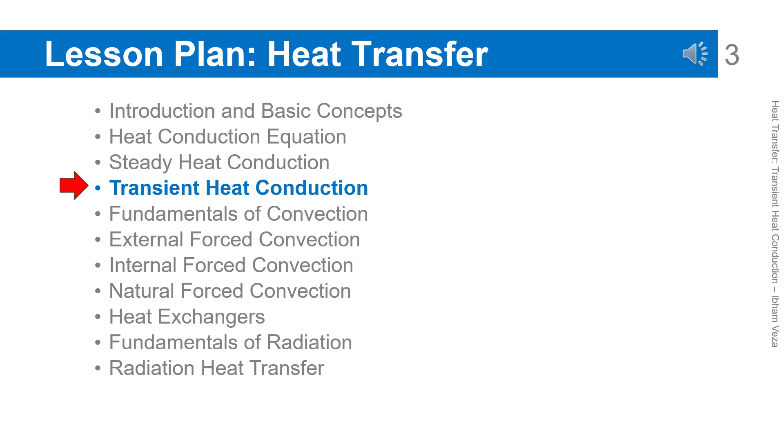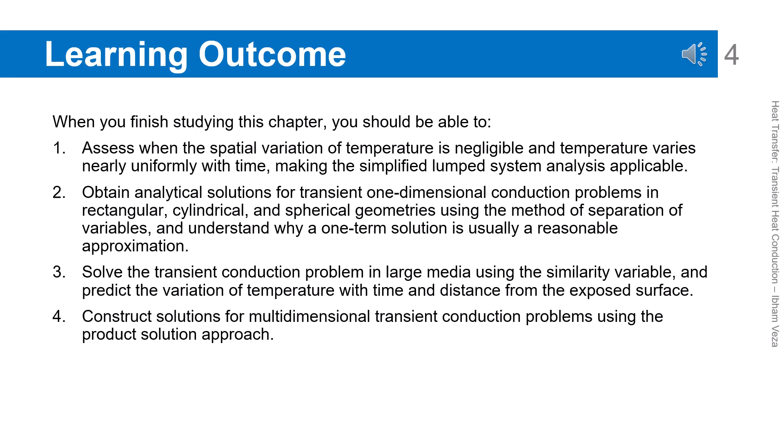Learning outcome. The learning outcomes emphasize the ability to choose the appropriate method for transient conduction problems. Students are expected to distinguish when the lumped system approach is applicable and when it is not. In addition, analytical solutions for different geometries are a major focus. The concepts of semi-infinite media and multidimensional solutions are also introduced. Overall, the outcomes are oriented toward analytical and modeling skills.

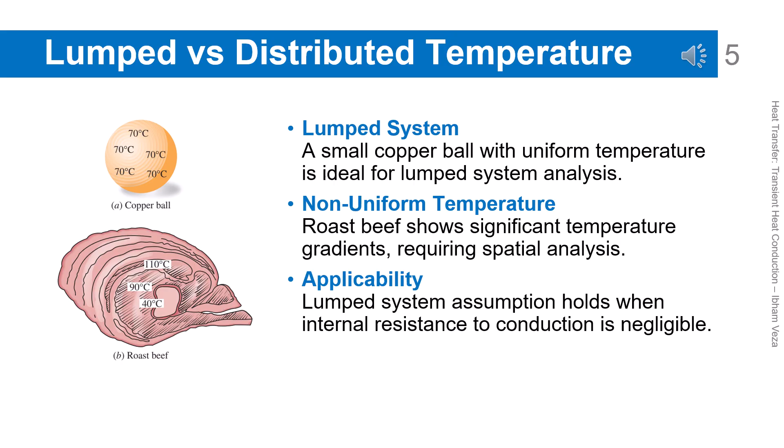Lumped versus distributed temperature. This concept compares two extreme cases of temperature distribution inside a body. In a lumped system, the temperature is assumed uniform throughout the body and changes only with time. In a distributed system, significant temperature gradients exist inside the material. This difference determines the complexity of the model that must be used. Choosing the correct assumption is critical for obtaining accurate and efficient results.

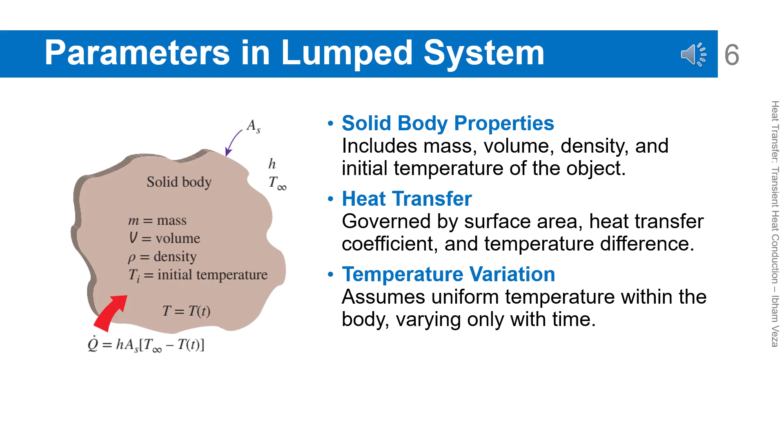Parameters in lumped system analysis. The lumped system analysis is based on the physical properties of the body, such as mass, volume, and initial temperature. In addition, surface heat transfer by convection plays a central role. The body temperature is assumed uniform and only a function of time. This greatly simplifies the energy balance equation. However, this simplification is valid only when the physical conditions are satisfied.

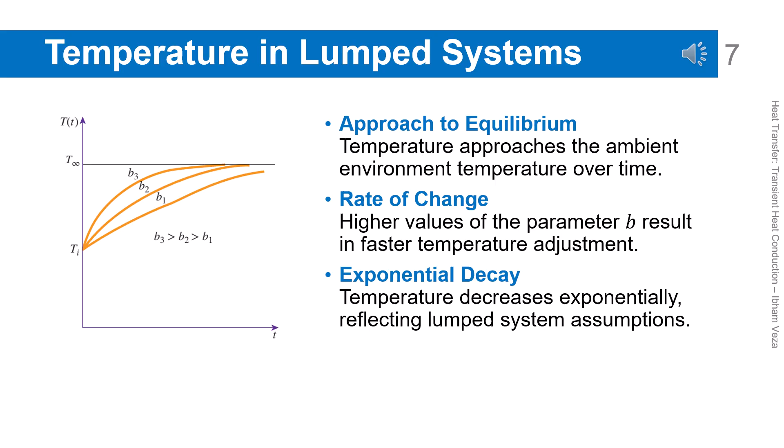Temperature behavior in lumped systems. The temperature change in a lumped system follows an exponential trend with time. At the beginning of the process, the temperature difference is large, so the heat transfer rate is high. As time progresses, the body temperature approaches the ambient temperature asymptotically. The parameter B controls how fast the system reaches equilibrium. This behavior reflects the assumption of no internal temperature gradients. Temperature decreases exponentially over time, reflecting lumped system assumptions.

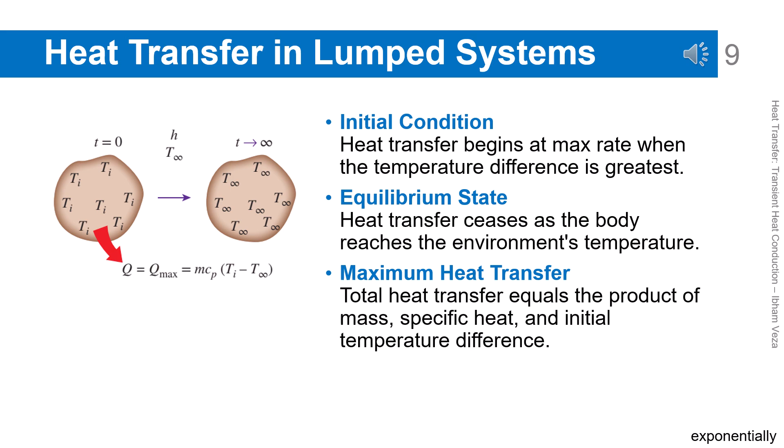Heat transfer in lumped systems. At the beginning of the process, the heat transfer rate is at its maximum because the temperature difference is the largest. As time passes, the temperature difference decreases, and the heat transfer rate also decreases. At the final condition, the body temperature equals the ambient temperature, and heat transfer stops. The total heat transferred can be calculated from mc times Ti minus T infinity. This concept is very useful for estimating simple heating or cooling times.

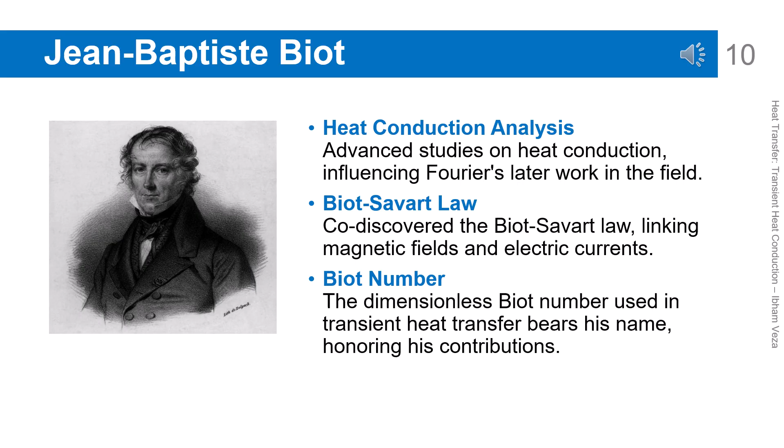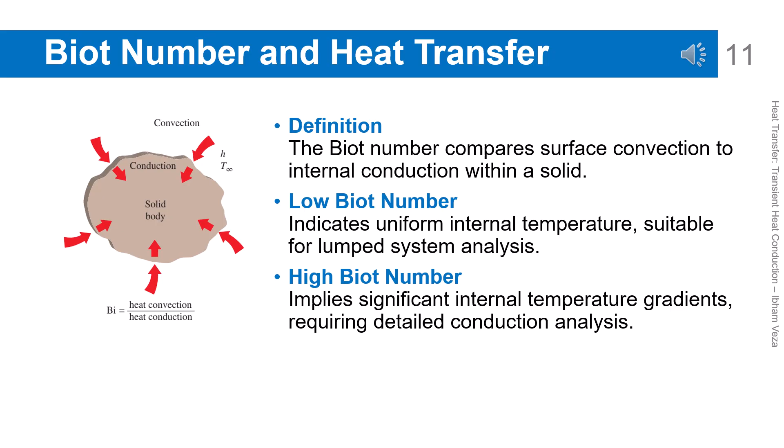The Biot number and heat transfer. The Biot number is used to assess whether internal temperature gradients can be neglected or not. If the Bi value is small, the internal conduction resistance is much smaller than the convection resistance. In this condition, the lumped system assumption is valid and safe to use. If the Bi value is large, internal temperature gradients are significant and a distributed analysis is required. Therefore, the Biot number becomes the main criterion for model selection.

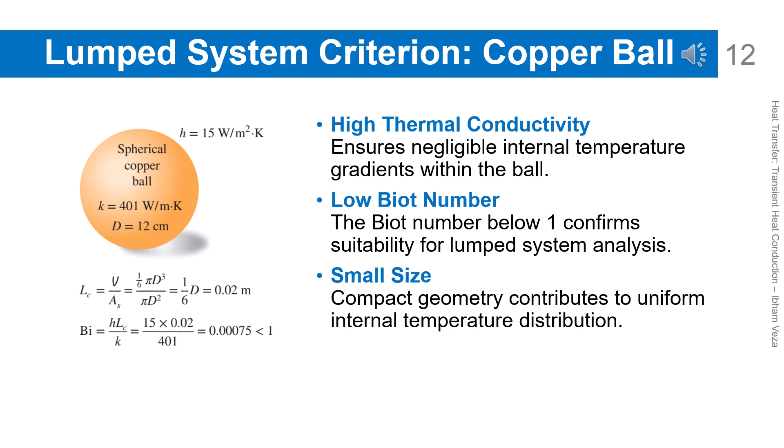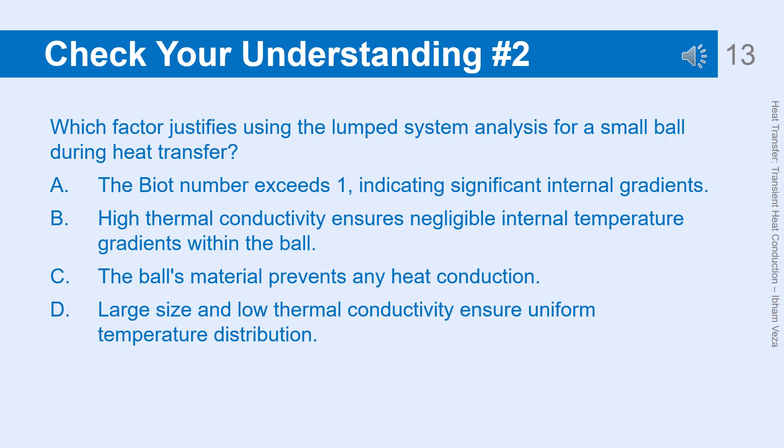Explanation of incorrect answers. A: Incorrect. A Biot number below 1, not exceeding 1, confirms the lumped system is valid. C: Incorrect. Heat conduction is essential for uniform temperature; preventing conduction contradicts the analysis assumption. D: Incorrect. Small size, not large size, combined with high thermal conductivity, ensures uniform temperature distribution.

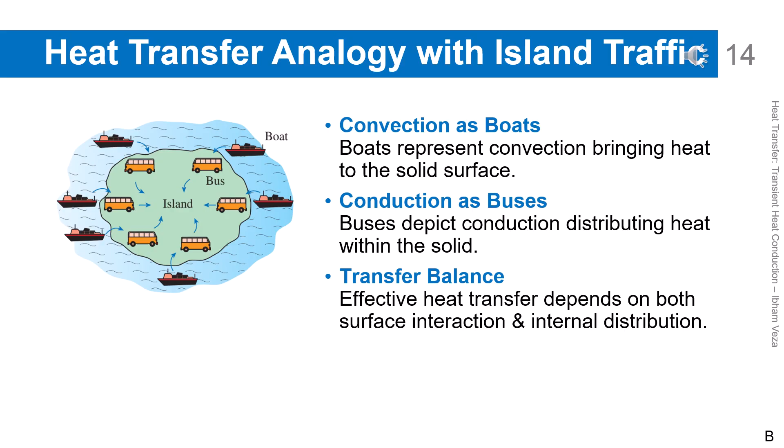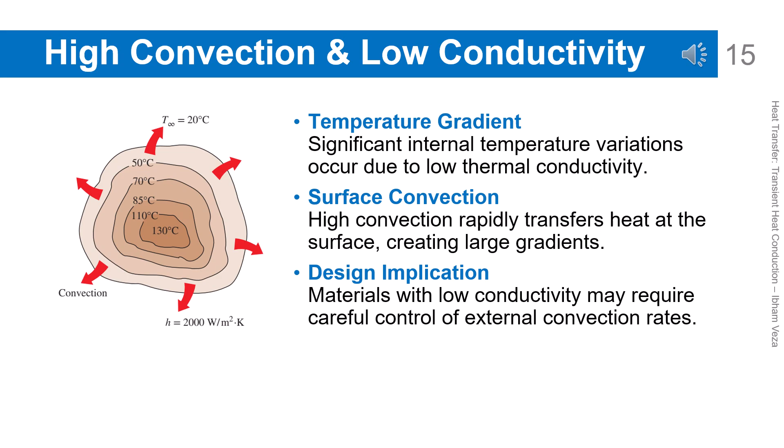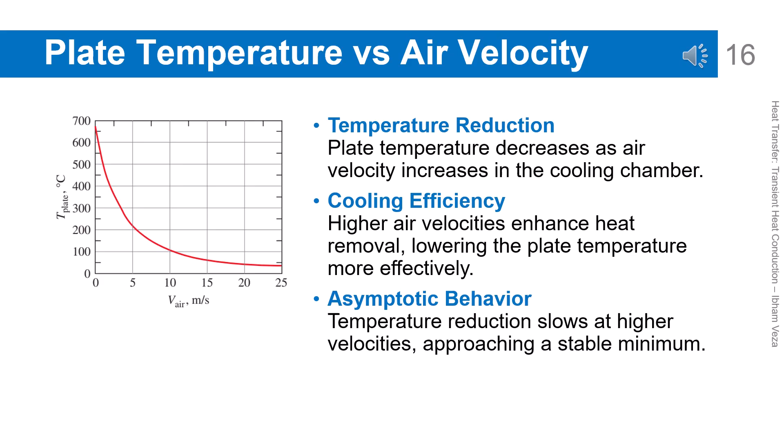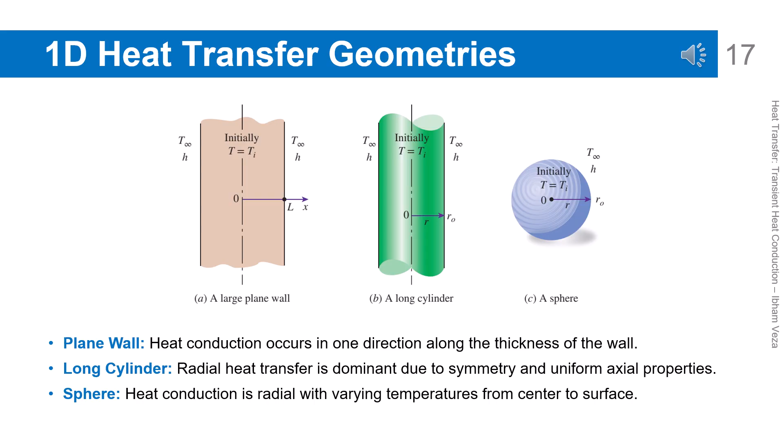One-dimensional heat transfer geometries. In these 3 geometries, the initial condition is usually a uniform temperature throughout the body. After that, heat transfer occurs by convection at the surface. Because of symmetry, the temperature variation needs to be analyzed in only one spatial coordinate. This approach significantly reduces mathematical complexity and is the basis of many classical analytical solutions of transient conduction. Heat conduction in a sphere is radial, with varying temperatures from center to surface.

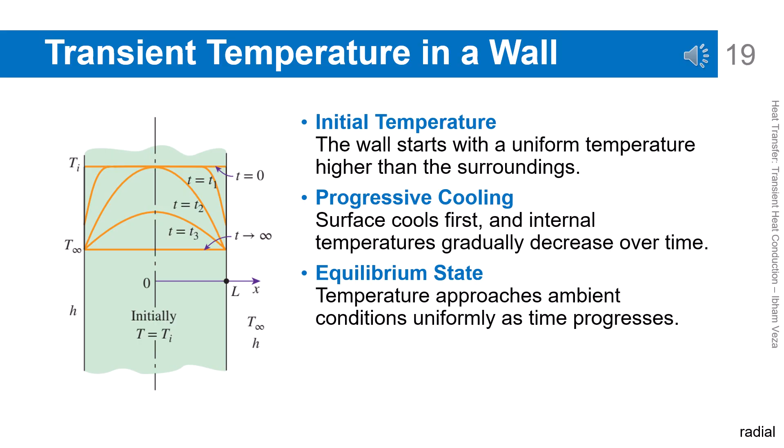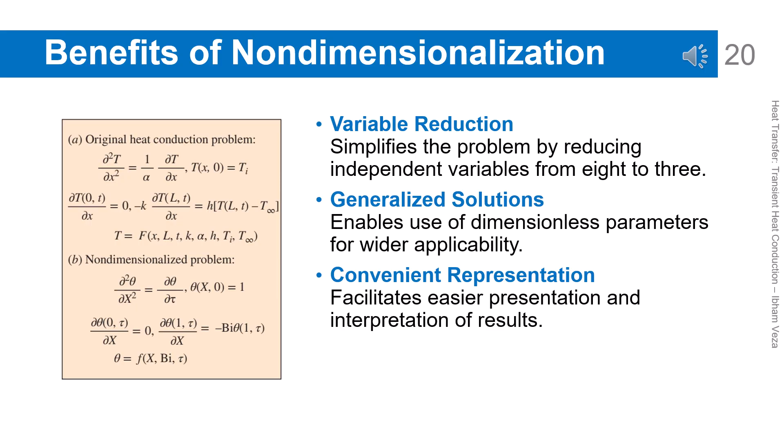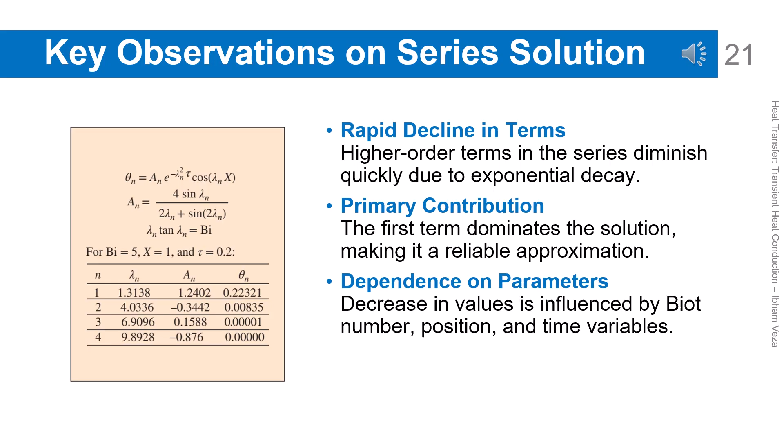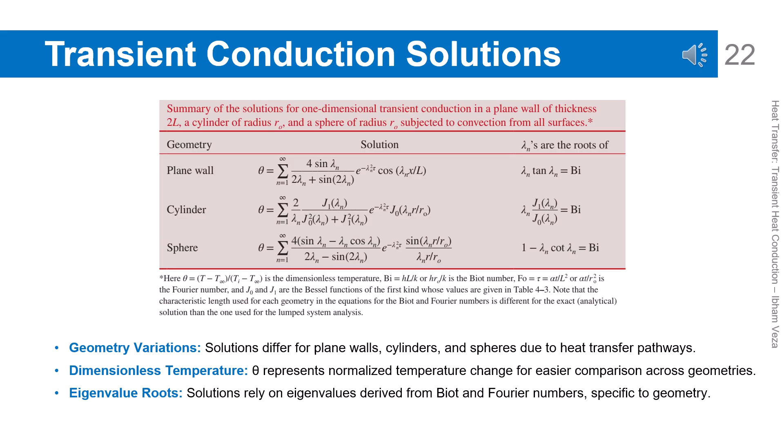Transient conduction solutions. This slide emphasizes that transient conduction solutions strongly depend on the geometry of the body. Dimensionless temperature is used to unify different cases within one analytical framework. Each geometry has different eigenvalue roots. Plane walls use trigonometric functions, while cylinders and spheres use Bessel functions. All solutions are still linked by the role of the Biot number as the connection between convection and conduction.

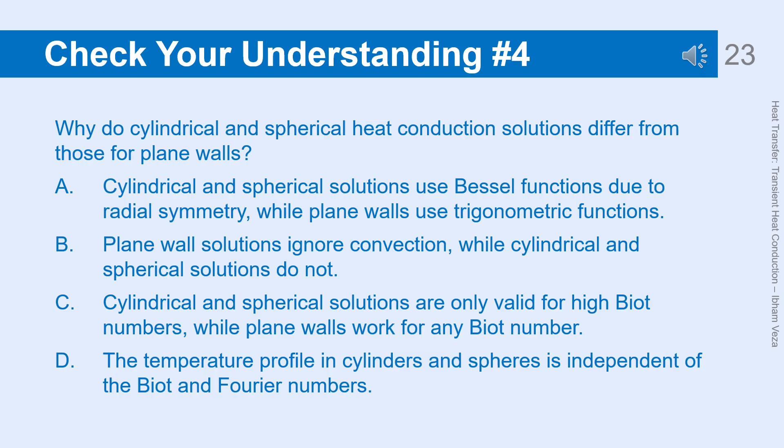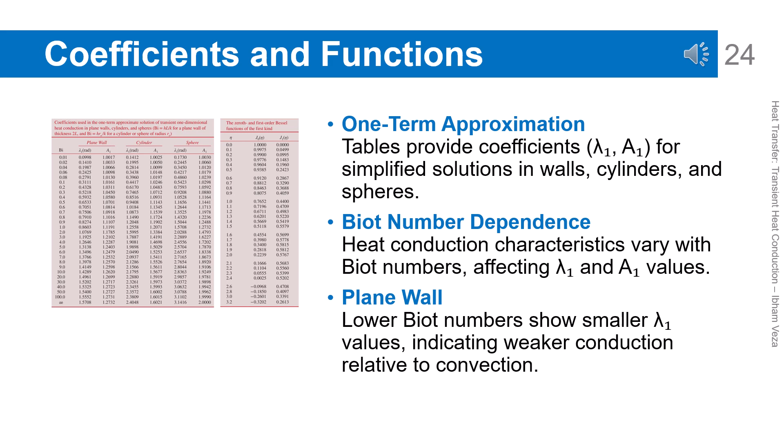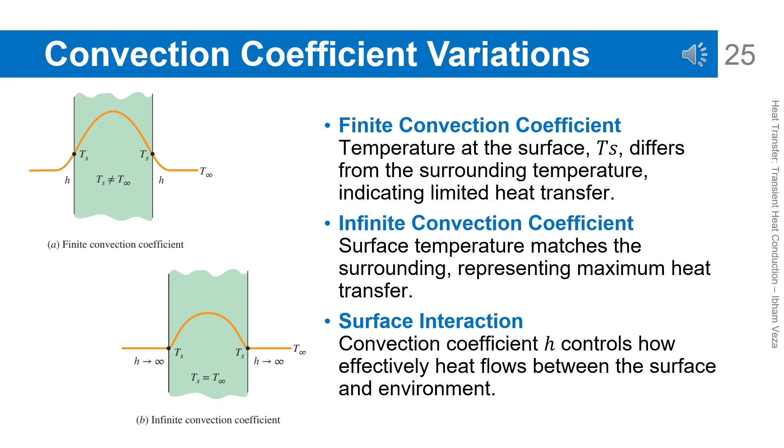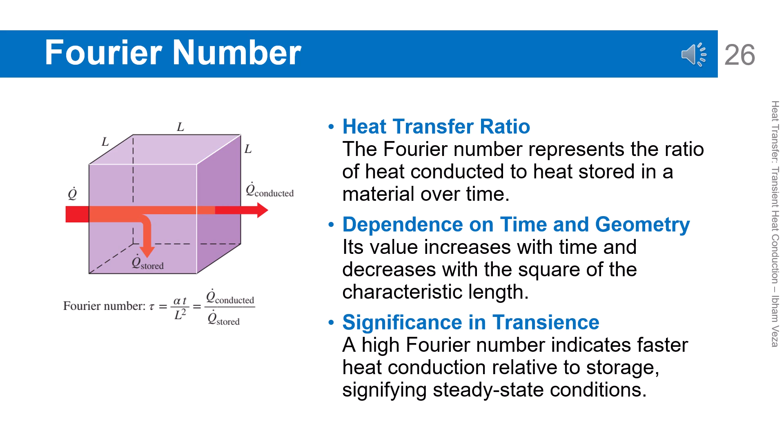Fourier number insights. The Fourier number represents the ratio of heat conducted to the heat still stored in the body. Its value increases with time and decreases as the characteristic length becomes larger. This number essentially measures how far the transient process has progressed. If its value is large, the system is close to steady state. Therefore, the Fourier number is a very important dimensionless time parameter, representing the ratio of heat conducted to heat stored in a material over time.

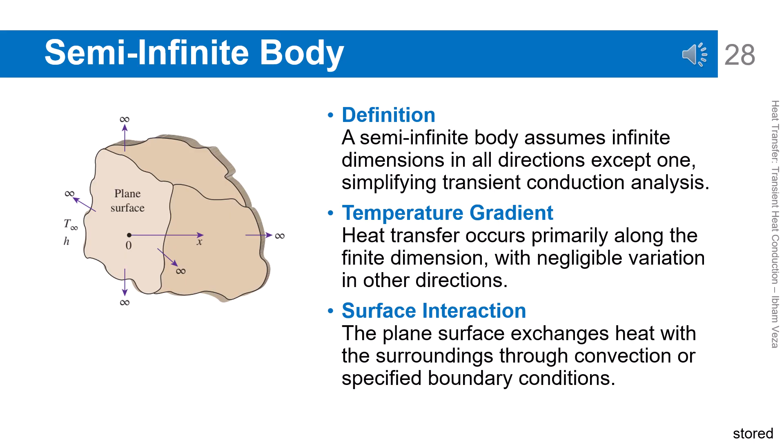Semi-infinite body characteristics. A semi-infinite body is assumed to be so large that heat has not reached the deep interior during the time of interest. With this assumption, the temperature gradient is significant only near the surface. This greatly simplifies the mathematical solution of transient conduction. This approach is suitable for short-time surface heating or cooling problems. Many early-stage industrial heating processes can be modeled using this assumption.

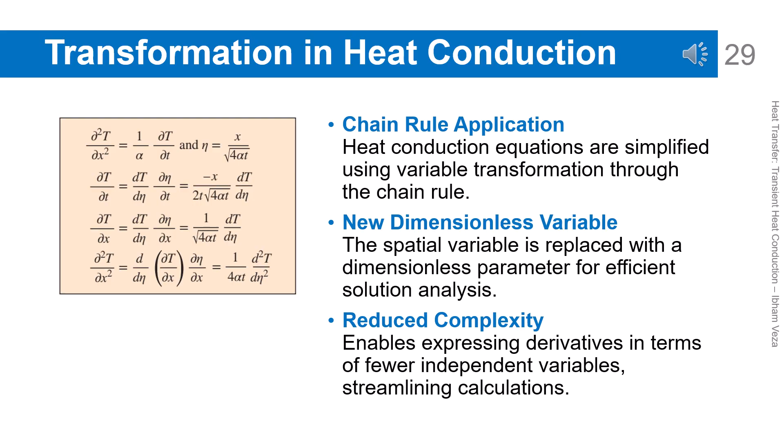Transformation in heat conduction differential equation. By applying the chain rule, derivatives with respect to space and time can be expressed in terms of a new variable. This new variable is usually a combination of position and time. This approach reduces the number of independent variables that must be handled explicitly. The result is an equation that is simpler and easier to solve analytically.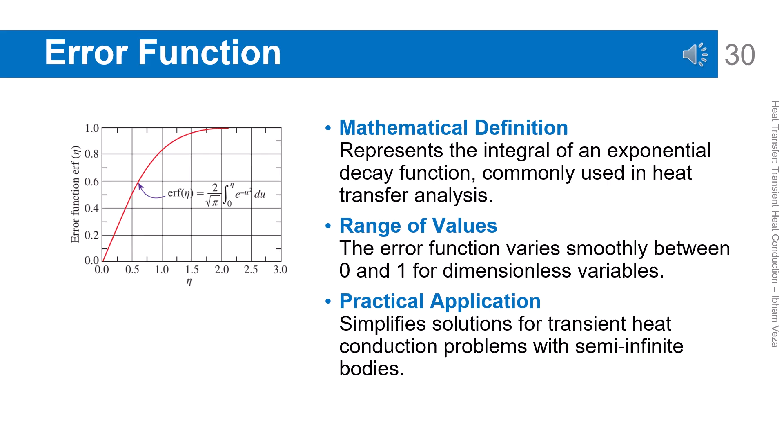Error function characteristics. The error function naturally appears in transient conduction solutions for semi-infinite bodies. Mathematically, it originates from the integral of a decaying exponential function. Its value varies smoothly from 0 to 1 over the range of the dimensionless variable. In the context of heat transfer, this function describes how far the surface temperature influence has penetrated into the material. Therefore, the error function is very important in modeling transient heating and cooling.

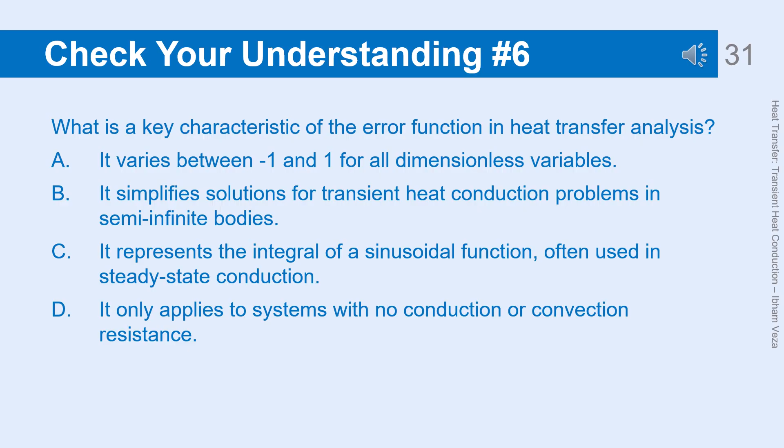Dimensionless temperature distribution. Dimensionless temperature distribution is used to present results in a general form without being tied to specific units. For a semi-infinite body with constant surface temperature, the solution follows the complementary error function form. The temperature decreases with increasing distance from the surface and with time. This approach allows one graph or one equation to be used for many physical cases. This is the main strength of using dimensionless parameters in transient analysis.

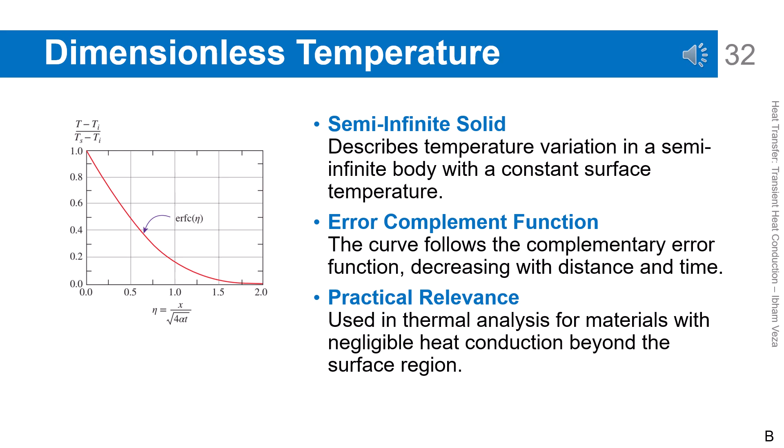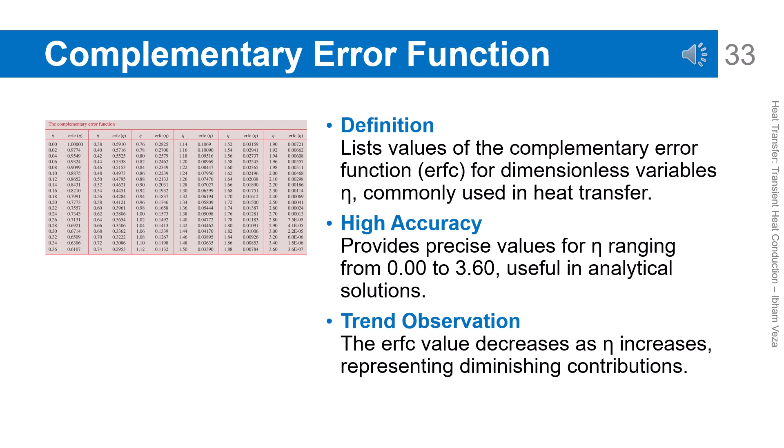Complementary error function table. This table provides numerical values of the complementary error function for various values of the dimensionless variable. These values are very important for practical calculations without performing manual integration. When the required value is not listed, interpolation can be used. The table shows that the function value decreases as the variable increases. With this table, transient conduction analysis becomes much more efficient.

Temperature variation in a large cast iron block. This slide illustrates various possible boundary conditions at the surface of a large body.

If the surface temperature is specified, heat penetrates deeper with time. If the heat flux is specified, a surface temperature gradient forms and gradually spreads inward. If convection dominates, the temperature curve shape is strongly influenced by the convection coefficient.

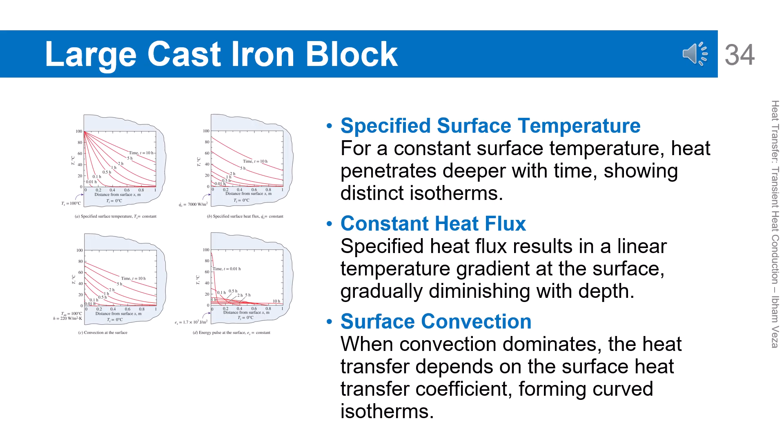All cases show that deeper regions require more time to be affected by temperature changes. High thermal diffusivity ensures quicker heat penetration and broader temperature distribution.

Temperature variation in semi-infinite solids. In a semi-infinite solid, the temperature is initially uniform and then changes due to convection at the surface. A higher convection coefficient causes faster cooling or heating near the surface.

The temperature distribution is usually expressed in a dimensionless form to allow comparison across different times and positions. Deeper regions require more time to experience significant temperature changes. This behavior shows that transient processes are strongly influenced by both depth and time.

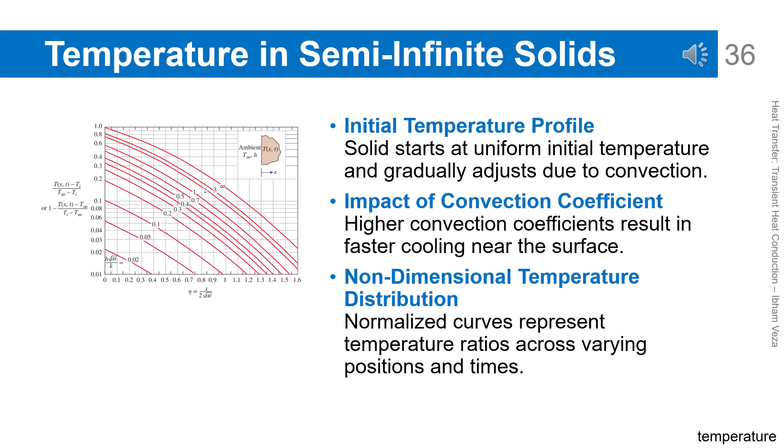Heat transfer between two semi-infinite solids with different initial temperatures come into contact. A temperature gradient immediately forms near the interface. Heat flows from the hotter body to the colder one until a local equilibrium is established at the interface. The interface temperature reaches an intermediate value determined by the thermal properties of both materials.

Heat then propagates into each solid at a rate governed by their thermal diffusivities. The penetration depth increases with time on both sides.

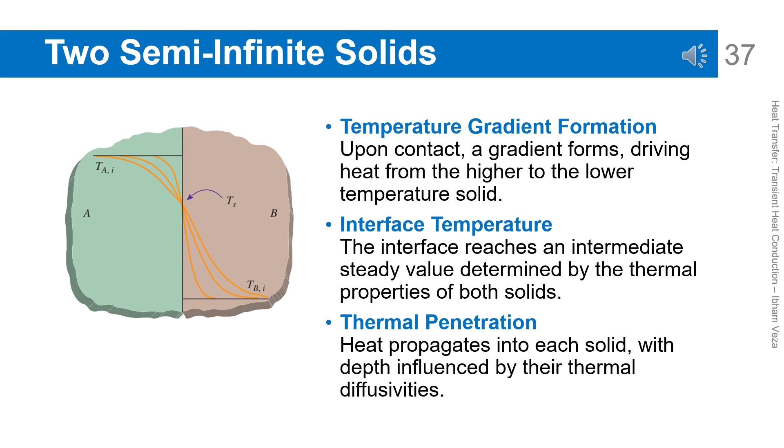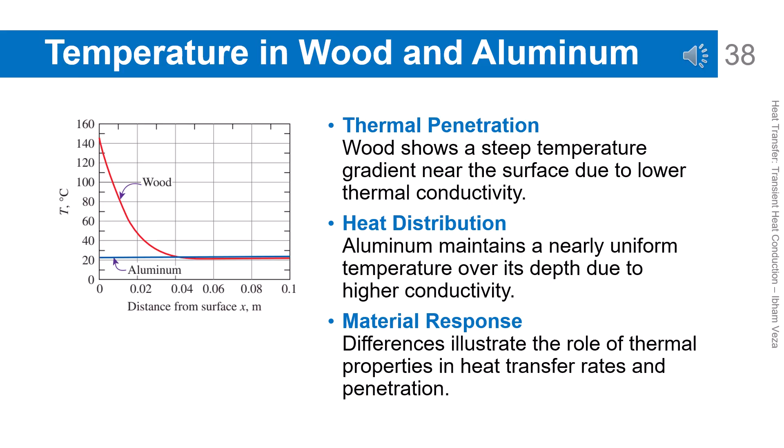The answer: A. Aluminum has higher thermal conductivity, enabling rapid heat distribution. Explanation of incorrect answers. B.

Incorrect. Wood has lower thermal conductivity, leading to a steep temperature gradient near the surface, not uniform distribution. C. Incorrect. Aluminum does not reflect heat to maintain uniform temperature.

It conducts heat rapidly due to its high thermal conductivity. D. Incorrect. Wood's steep temperature gradient is due to its lower thermal conductivity, not higher.

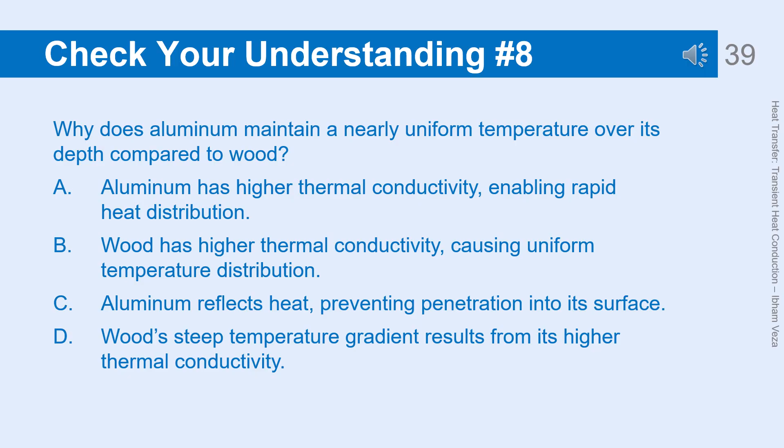Heat transfer in cylinders. In a long cylinder, heat transfer occurs mainly in the radial direction because axial temperature variations can be neglected. For a short cylinder, heat transfer becomes two-dimensional, involving both radial and axial directions.

All exposed surfaces interact with the surroundings through convection. Geometric dimensions such as length and radius strongly affect the heat flow paths and rates. Therefore, the one-dimensional simplification is only valid for sufficiently long cylinders.

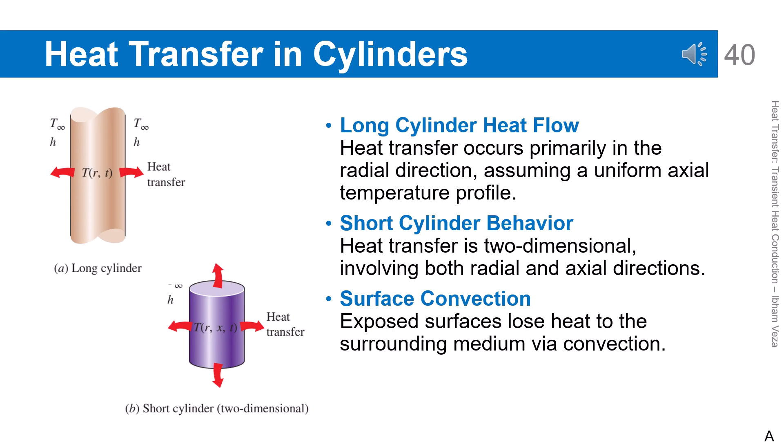Short cylinder plane wall intersection. A short cylinder can be viewed as a combination of a cylindrical geometry and a plane wall. Heat transfer occurs through both the curved surface of the cylinder and the flat surface.

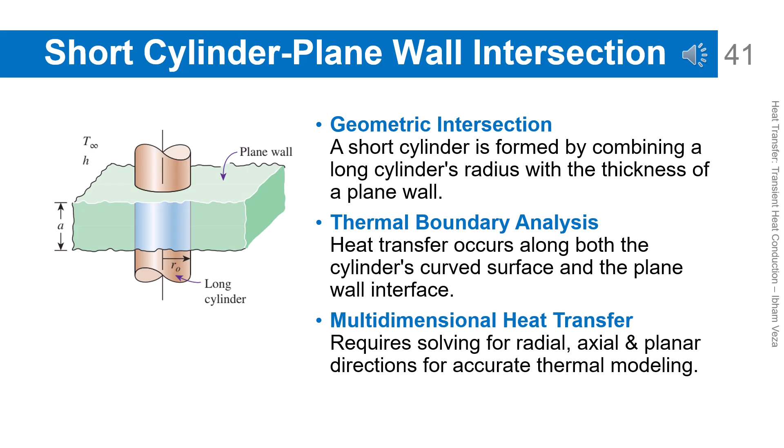Therefore, the problem can no longer be simplified to a one-dimensional case. An accurate analysis must consider both radial and axial directions simultaneously. This case illustrates how complex geometry requires a multidimensional approach.

Rectangular bar in plane wall. A rectangular solid bar can be formed at the intersection of two plane walls. Heat flows not only within the bar, but also through the adjoining walls.

The thermal properties and boundary conditions of the walls strongly influence the temperature distribution in the bar. The heat flow in this case is multidimensional and coupled. As a result, the solution is much more complex than that of simple one-dimensional geometries.

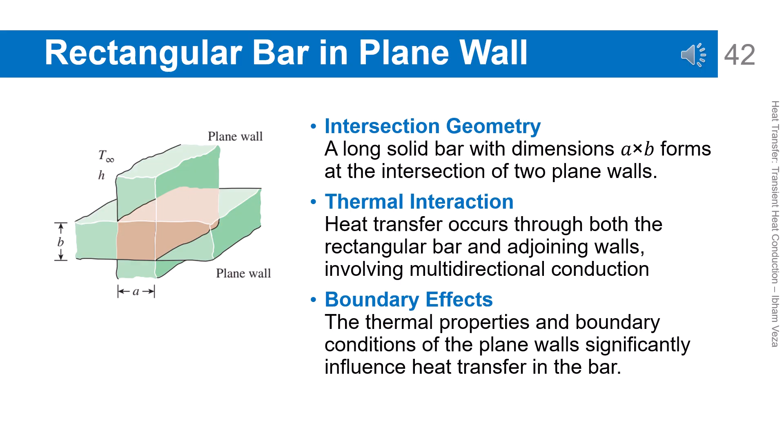The answer: A. The thermal properties and boundary conditions of the plane walls. Explanation of incorrect answers. B.

Incorrect. While the dimensions of the bar affect conduction, the plane wall's thermal properties and boundary conditions also play a crucial role. C. Incorrect. Heat transfer involves both the bar and the adjoining walls, as they interact thermally.

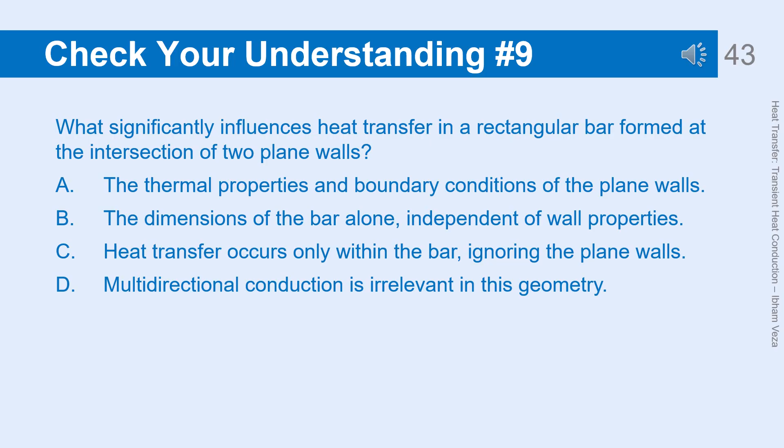D. Incorrect. Multidirectional conduction is critical in this geometry, due to heat flowing in multiple directions through the bar and walls. The reference is from Yunus A. Çengel and Afshin Jahanshahi Ghajar, Heat and Mass Transfer, Fundamentals and Applications, McGraw-Hill Education.